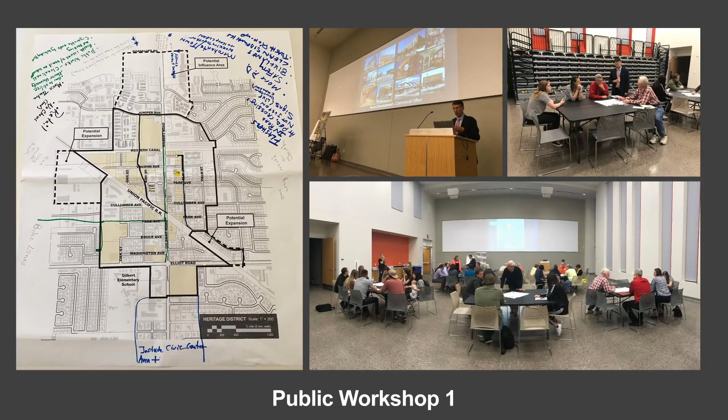The planning area was discussed, and there was consideration for potential expansion areas. Through that discussion, the planning effort will look at a 5 to 10 year redevelopment strategy for the Heritage District itself, and also provide some input for long-range planning of the area west of the Heritage District you see outlined, where the lumberyard occurs today. No consideration will occur for any other areas, north of the district or east.

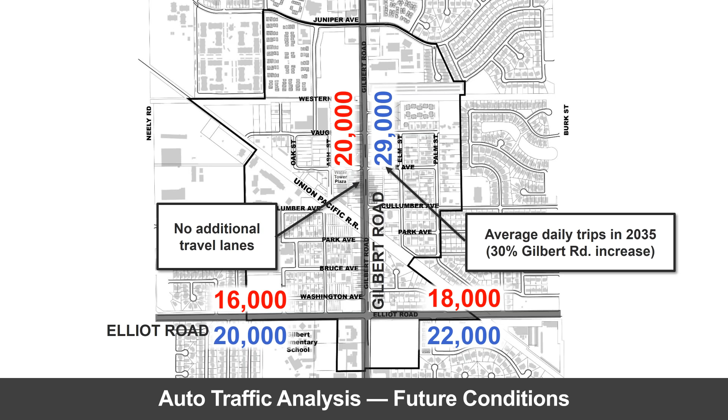Transportation was also analyzed. The first was to look at auto traffic and average daily trips, the amount of cars and trucks moving up and down Gilbert or Elliot Road, indicated here, and also looking at the future. The town has a model anticipated in 2035. That model anticipates a 30% increase of traffic without any additional capacity, so more congestion on Gilbert in particular.

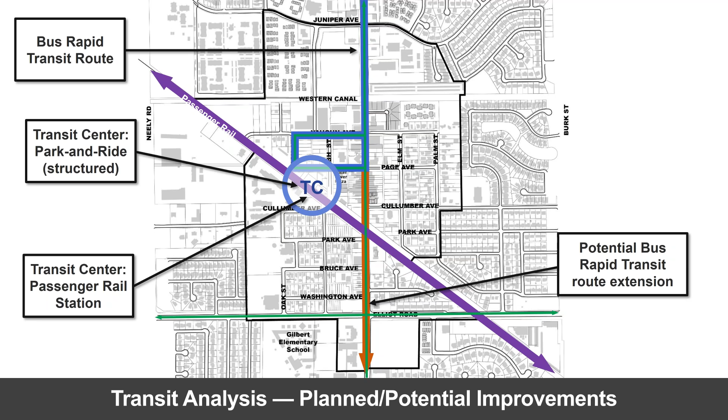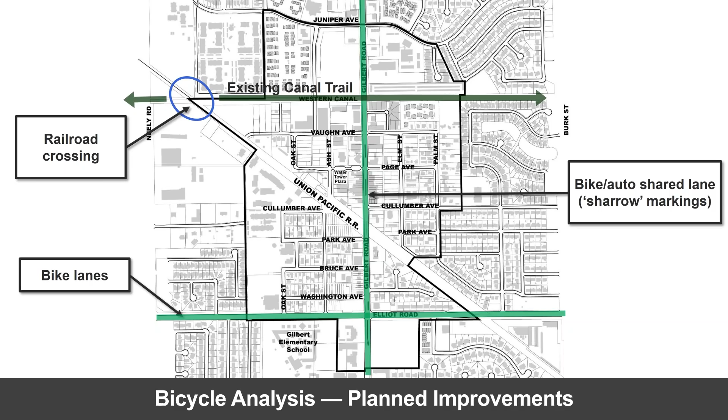To relieve that, there are some options. Transit, whether it's a passenger rail system with a stop in the Heritage District or bus rapid transit, will give some relief, along with moving people out of automobiles into bikes and walking. So the town currently has a bike master plan showing these existing facilities on the canal and anticipated changes with bike lanes and shared lanes on the areas where you see the green line.

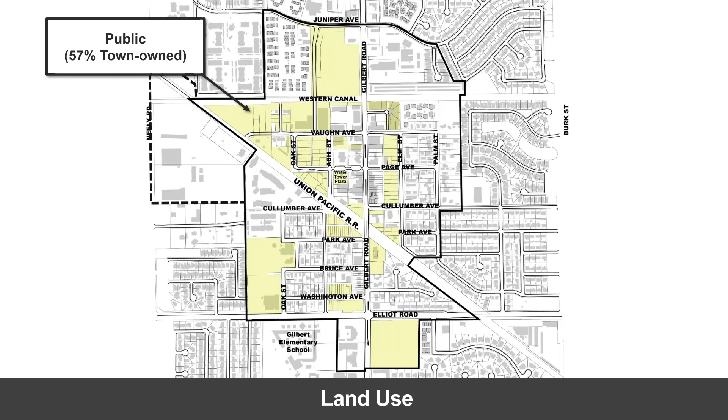Land use was also analyzed, and a recognition that the town owns 57% of the area you see indicated in yellow. That's really the focus of the planning study. And then we looked at the areas within the district as a whole and did an analysis of areas where we anticipated high potential of change within the next 5 to 10 years. And the areas where there's low potential, and in fact in many areas no potential for change, we see in the dark gray areas.

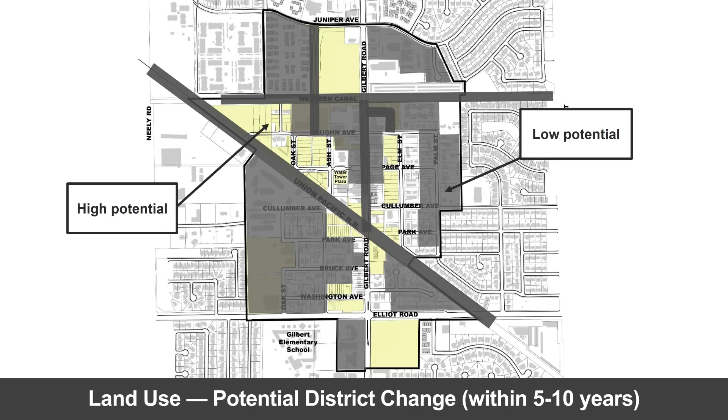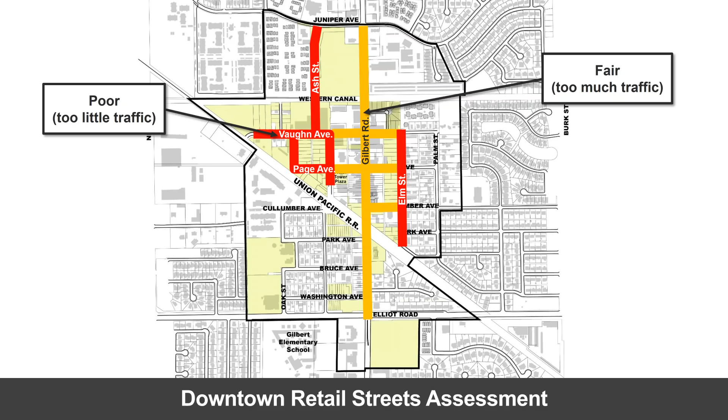With that, we looked at where we can meet that condition from 8,000 to 15,000. There, frankly, are none. As Gilbert becomes more and more busy, it becomes less pedestrian friendly and less retail friendly. And current roadways, because of their dead-end nature or lack of connectivity, have too little traffic. So you see Vaughn, Page, Ash, and Elm.

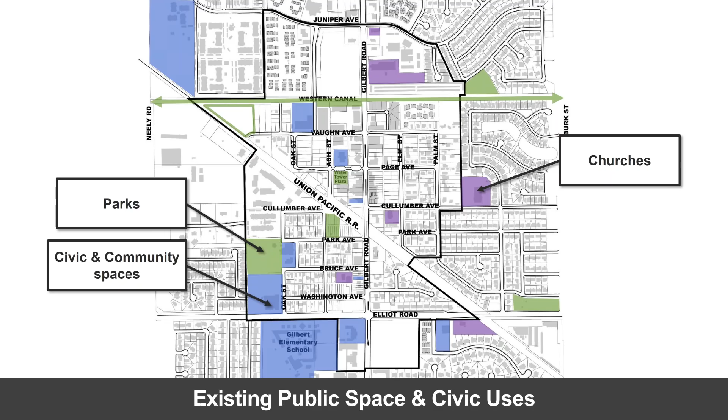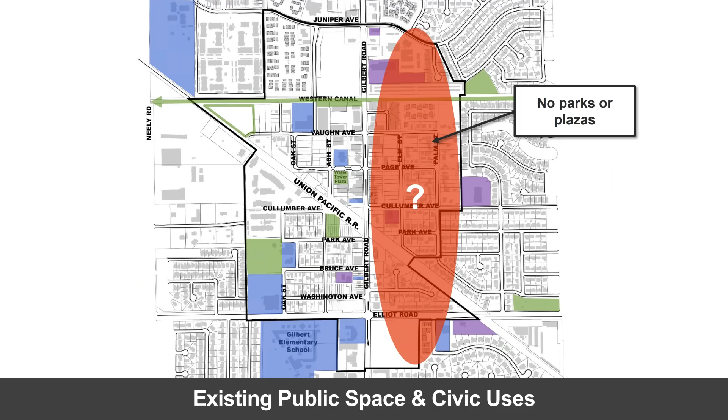Moving on to public spaces, the areas where you do have a considerable amount of parks, civic, and community space are illustrated in this diagram. There's a lot of those, generally west of Gilbert, but there are no parks and plazas east of Gilbert Road, and what could be done to address that issue.

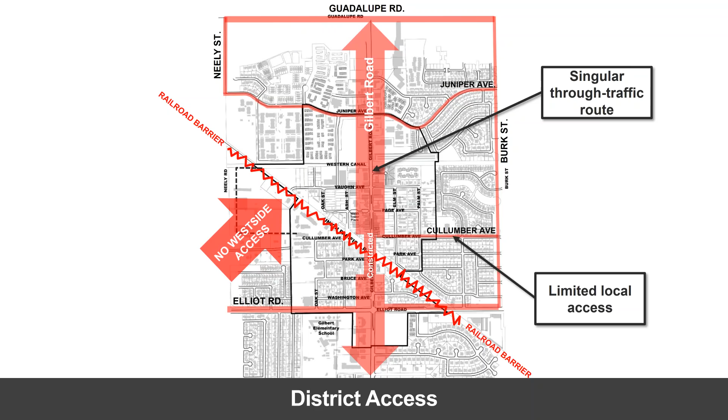Parking and transportation opportunities and constraints were also assessed, and this is a key component of this entire planning study. Gilbert is a singular route through the district. There is some limited access through existing residential areas or along Juniper Avenue today, but there is no west side access, largely due to the railroad barrier, and what can be done to resolve that issue to give more balanced access to the entire district.

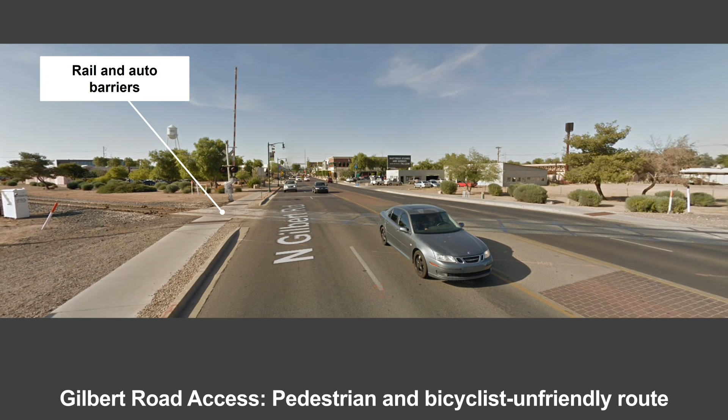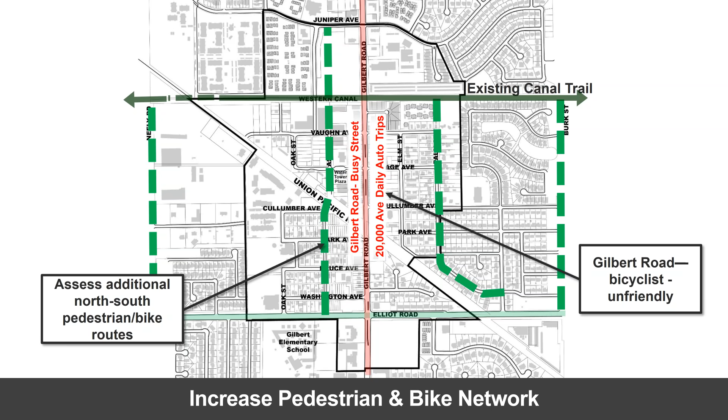Transferring people out of cars is identified by the community, so we also assess that in terms of opportunities and constraints. A lot of comments about the difficulty of walking along Gilbert. It's not pedestrian friendly, it's not bike friendly, largely due to the high traffic volumes and also the barrier created by the railroad track. And the idea here is to look at opportunities for parallel routes to that roadway. Not forget Gilbert, but look for other ways, Neely, along Palm, maybe Ash or Burk, to connect from the canal down to Elliot Road.

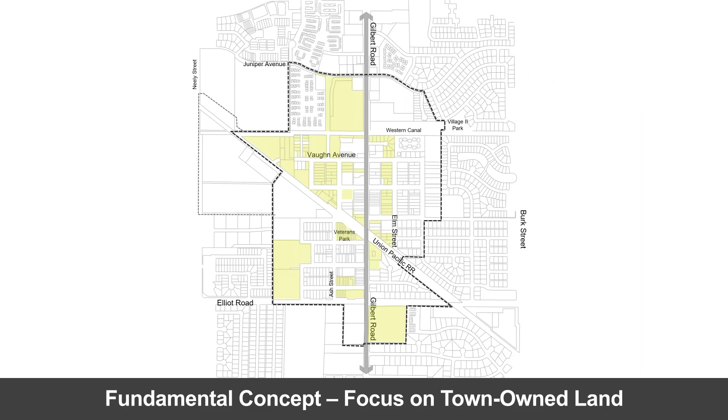With that background information and assessment, the master planning team developed a series of concepts. And so the focus of these concepts is really intended to look at things that can occur within the next 5 to 10 years, and really focus also on addressing those town-owned parcels. So a map was developed and it separates essential public amenities and key redevelopment areas.

Successful districts or downtowns follow a recipe that suggests that to leverage the highest and best use of redevelopment parcels, you need to build the public amenities, increase value, and also improve livability. So let's look at these individually by category, starting with the essential public amenities. You see 5 of those, and let's go through the character and the key points of each of those. So this is also in response to some of the issues that have been identified by the community, and so we're loosely calling this the living room.

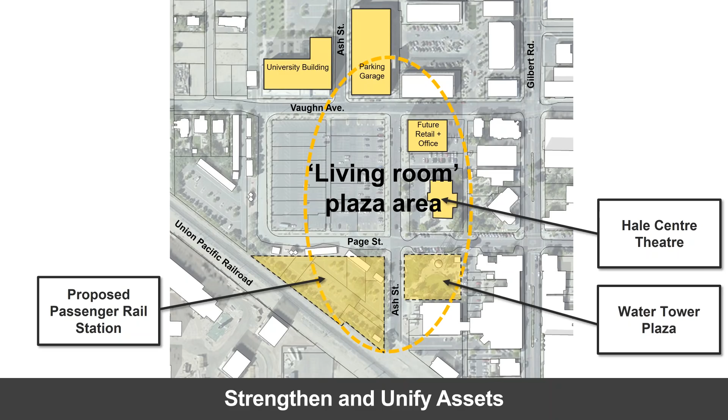The plaza, where you can have a farmer's market or other uses that have been desired for the area on a reserved permanent basis. In addition, it needs to be, to use an overused term, an iconic space where people instantly recognize it. So the place for a Christmas tree, for example, that becomes Instagram worthy. That's what this area should be. It should also not ignore some of your assets. The water tower is very important as part of the identity of the Heritage District, the Hale Centre as well, and the future passenger rail may also contribute to the character of this living room plaza. They should be strengthened and unified.

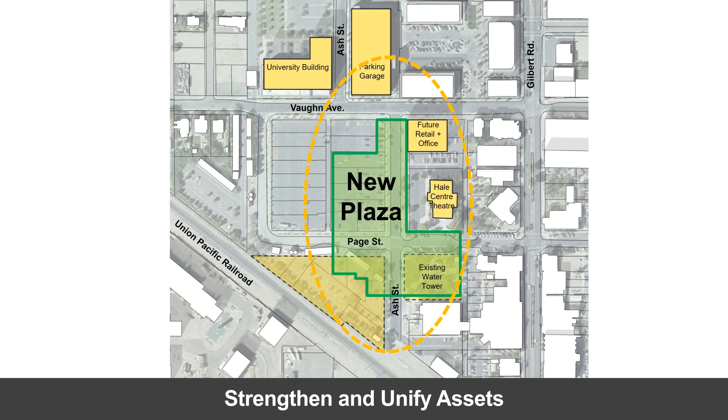The plaza area suggested occurs where you see the green coloring that would extend from Page all the way up to Vaughn and incorporate those roadways as part of the plaza space. To maximize the use of this space, Ash Street is suggested to be relocated so it aligns with the current alignment that goes between the university building and the parking garage.

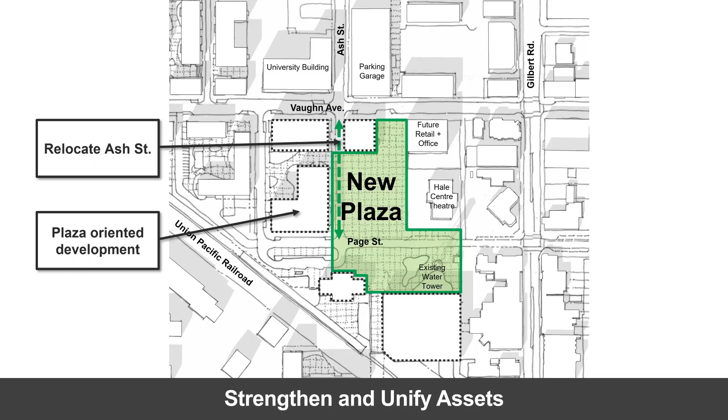The Commons is a second space, and the common space is different from the living room in that it is really intended to be the focus for nightlife activity, a dining and entertainment amenity. So as the market responds to a growing desire for additional dining and entertainment uses, those are suggested to move north of the canal and focus around this space. So the space also has another value in that it provides a window from Gilbert Road.

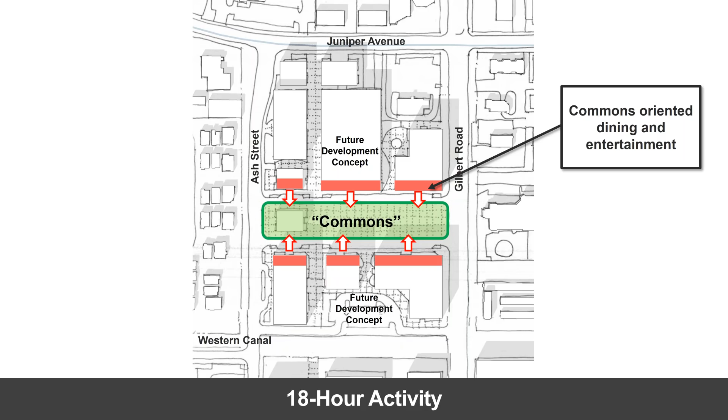So the Commons in itself is located about halfway between the Western Canal at the south of this graphic to Juniper on the north, and connects Gilbert Road to Ash Street. It's about 180 feet in width. Improves visibility, so no parcels out back and behind. It includes a couplet roadway, so a low-speed roadway for travel and also curbside parking. It would have buildings oriented to that space, so there wouldn't be parking lots between that roadway or the Commons, and the buildings really engage and provide a comfortable sense of enclosure along the edges.

Next is a neighborhood park. The neighborhood park would do this. It would be family friendly and it would be a residential amenity. It fills the void of a lack of open space east of Gilbert, and it would have more of a quiet, intimate, multi-use, residential focused collection of uses such as play structures or green areas or other elements that you would find in a typical neighborhood park. It would be located at the intersection of Elm and Page.

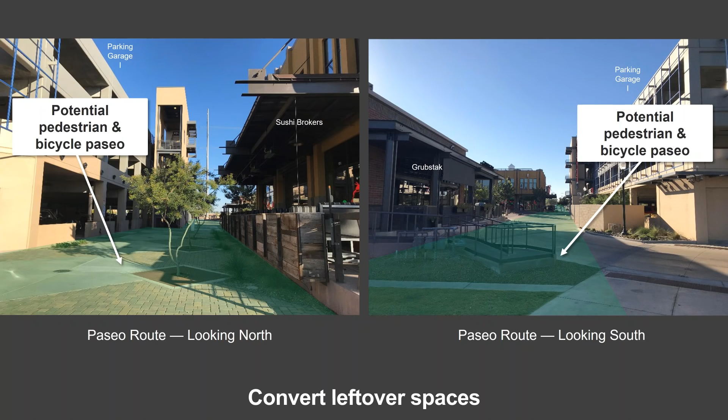The Paseo route would not be one size fits all through its entire corridor, and you see this diagram going from Elliot all the way up to Juniper again today. It would have 3 segments. Within the northern area that extends from Juniper down to the anticipated new living room plaza, it would be mostly or almost all car-free. And through that area, we would anticipate there might be segments where you may need access to service or loading. And when those uses are adjacent to the area, the car would be, as we describe it, as a guest. It would be low speed, 5 to 10 miles per hour at most, so that there would be a bias towards the pedestrian and the cyclist.

There's a segment that needs to cross the track. So that's a barrier that we want to bridge, or actually in this instance, go under. So we're anticipating an underpass. So we know, having worked with Union Pacific before, that it's very difficult to get an at-grade crossing, and it may take many years, and they probably still don't really want you to do it. So a better proposal may be to go under. And so what would that look like?

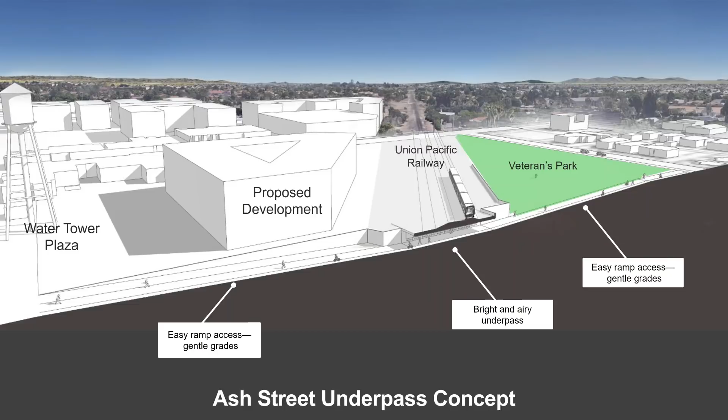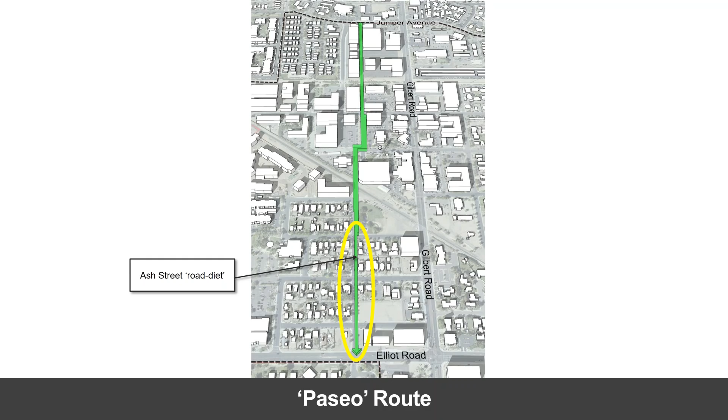South of that area, we'd like to see an enhanced bike facility complement the existing sidewalks. So within this area, we're suggesting what is called a road diet. And when we mean a road diet, that doesn't mean removing auto movement capacity, but auto parking only. So access to all streets, to all residential uses, to all the alleys would be maintained along this segment. And to get access to the school and other uses that are south of Elliot, we would suggest building what's called a protected bikeway, and it would look something like this.

And from experience from areas that get high bike ridership through districts, you need to do this. This separates pedestrians, cyclists, and auto traffic into their own exclusive lanes. And when these are built, you get the highest bike ridership. So what would that look like? So here's an example looking north on Ash from Elliot north. And the intent here, again, with this road diet is not to remove auto traffic lanes. So if you've got 2 lanes today, those would be maintained.

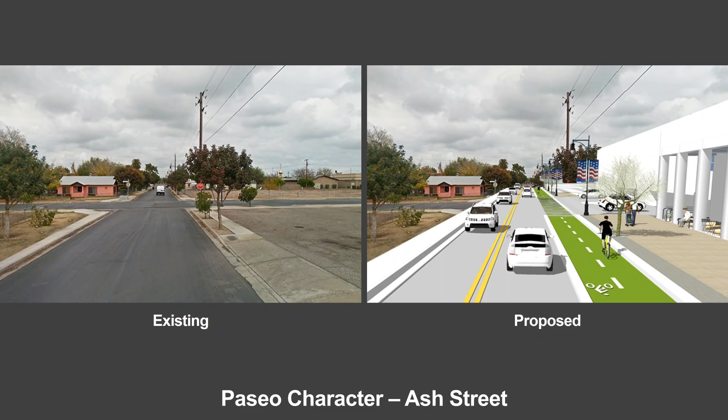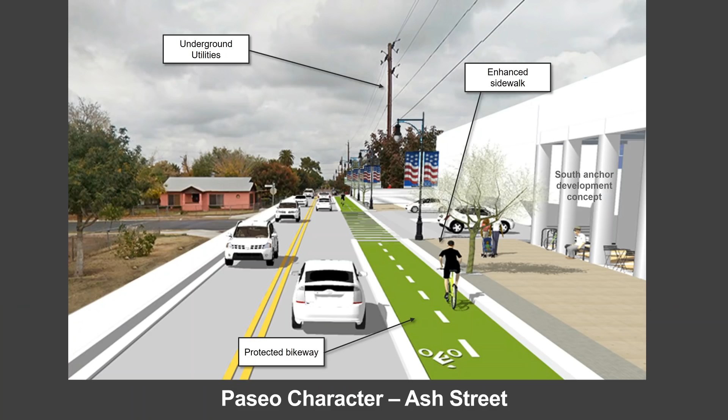The parking lane that is currently on Ash would be converted to a 2-way bike lane that you see on the right side that would be separated by a curb, and it would be raised. So the current curb-to-curb dimension is 30 feet. The improvements would be built within that, and 2 10-foot travel lanes would be maintained. There would be some other enhancements as well to the existing sidewalks. We would anticipate undergrounding of utilities as well within this corridor. But the key component of this is really the bikeway that ties into the planned network on Elliot as part of the bike master plan.

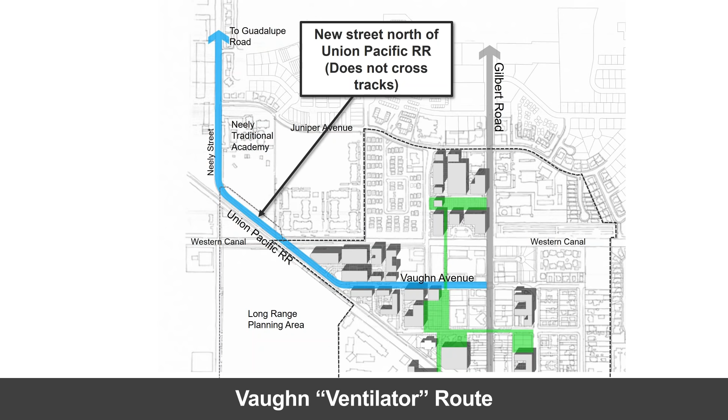And that blue line would be Vaughn Avenue that does not cross the track, but runs parallel to it and connects up to Neely all the way up to Guadalupe Road. It would be skirting the edge of the Union Pacific Railroad and also occupy a small area of leftover land at the south end of the Neely Traditional Academy. And so you see that alignment.

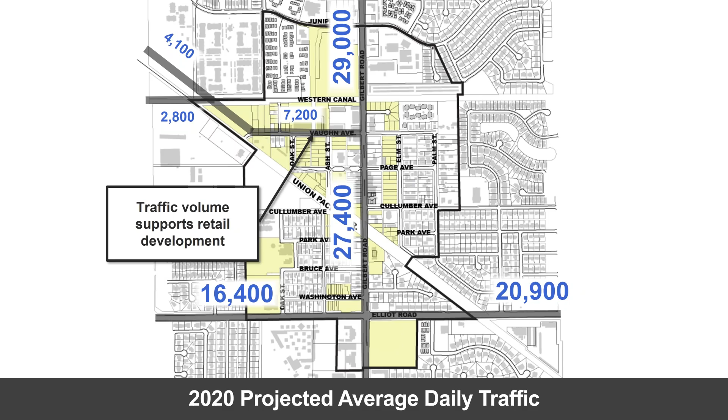We've done some traffic analysis of this, and the good news for this is it does provide traffic relief, about 7,200 average daily trips a day. And the second part of that good news is that when we look at the fundamentals for drive-by traffic for retail, this is getting close to that sweet spot of 8 to 15,000 trips a day. So it's close, and as a result of this, we think we can get street-oriented retail on this corridor. And that retail would look something like this.

So the retail here is intended to fill a void that is absent in the district today. And that is the kind of uses that we often hear people ask for, the kind of uses that people want to stroll and walk along. Experiential retail, it's often called. The kind of things that you would want to window shop while you're waiting for a restaurant seat along Gilbert today, so a table in those areas. We've heard people mention that many times. And it would be designed in terms of a celebratory kind of character, a festival street, if you will.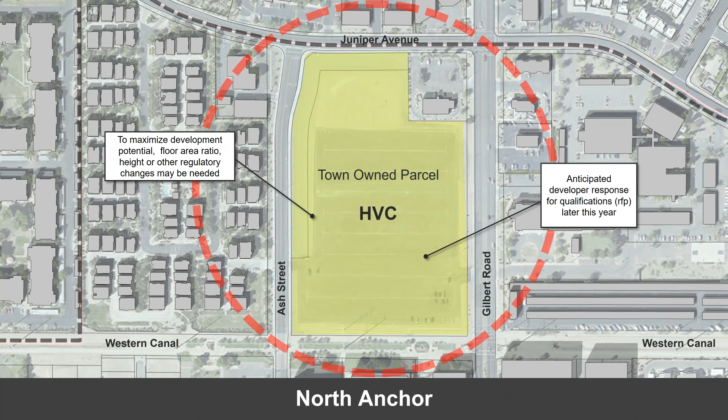So those are the key public improvements. So with that, then those would leverage some key redevelopment parcels. And we've broken these down into 3 key areas, and we expect this development to occur within the next 5 years. And so let's start with the North Anchor. The city is anticipating a response for qualifications from the development community sometime in the year. So this is a time-sensitive project area. And so currently it's zoned HVC, which is Heritage Village Commercial, and there may be some adjustments needed to that. So the area is generally from Ash to Gilbert, from Juniper down to the canal.

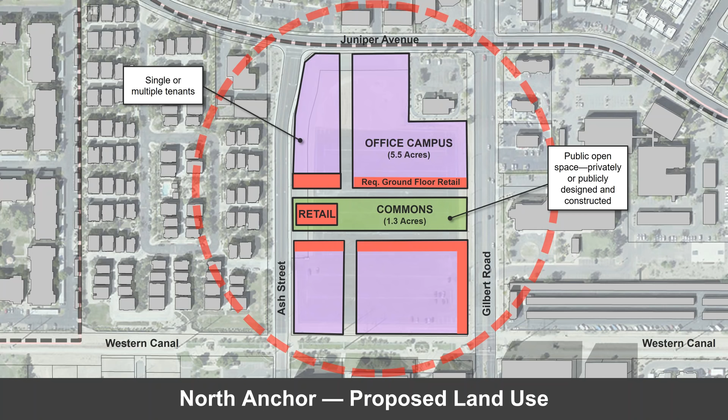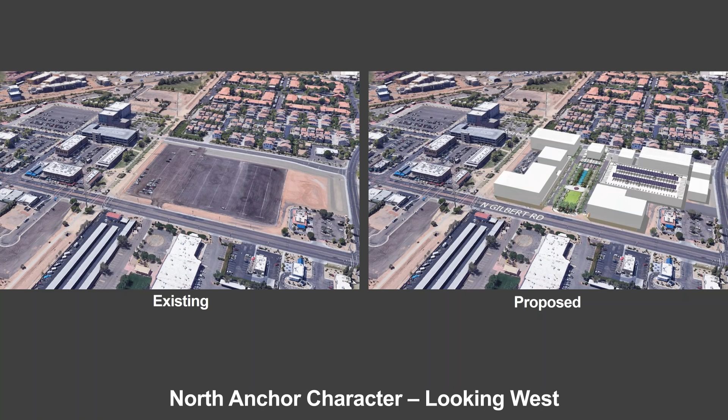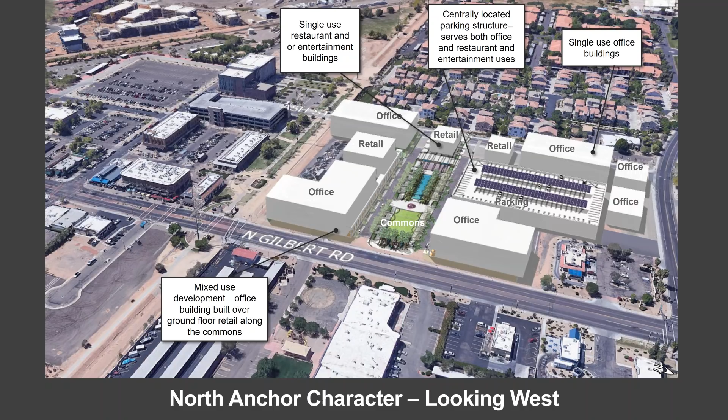Here's the concept for development, responding to the market. The hot market is office, and this office would be a campus, if you will. So it could be single or multiple tenants with ground floor retail, commons focus for that. And that's the general characteristics, what we'd expect. So looking at it in terms of 3D, on the left is existing, this is looking from the east towards the parcel, and here's the blow up of that. So generally if you do an office campus, you need a parking structure, and then the office and retail uses surround that, and it also has that focus for the commons that creates additional value adjacent to that area. Here's another view of that space. Again, this responds to current zoning regulations, doesn't require an upzone at all.

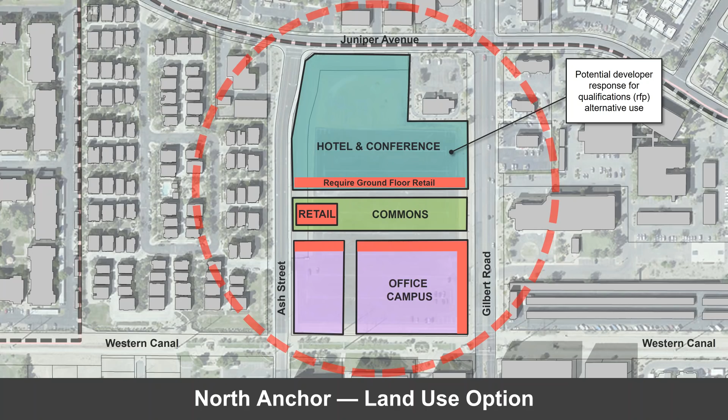Good plan always has flexibility, so as part of a developer offering, we'd also suggest hotel and conference for this site. So we know that there's a market up to 320 rooms, so you could easily fit that here, and also have area for expansion. We often find cities don't anticipate success and don't have expansion area. This site is ideal for expansion. Finally, there has been some interest in multifamily, and while you could build multifamily, they're not necessarily compatible with ground floor entertainment uses because of the noise and activity that extends beyond the hours people would prefer if you lived on a retail development adjacent to those types of uses.

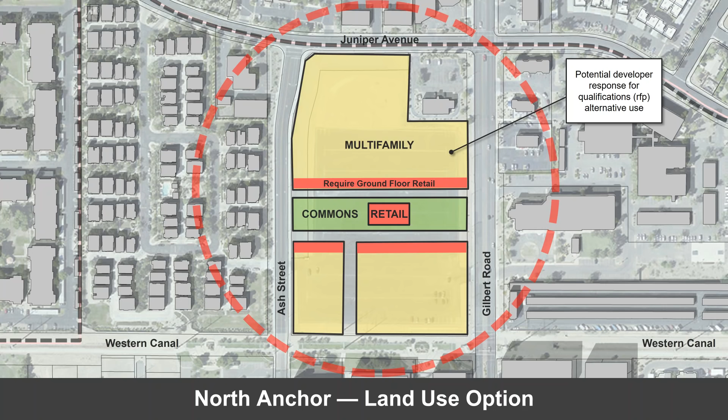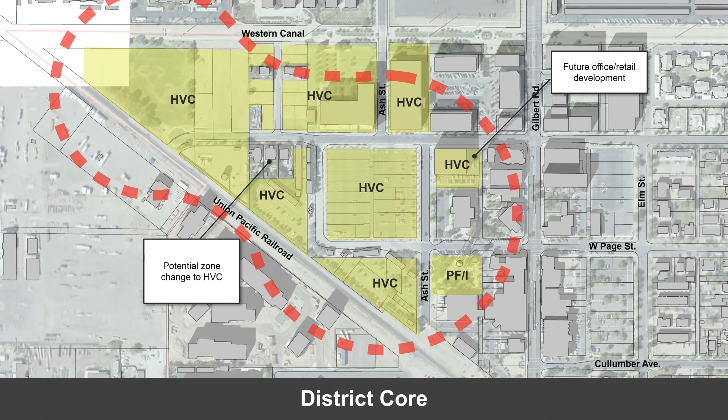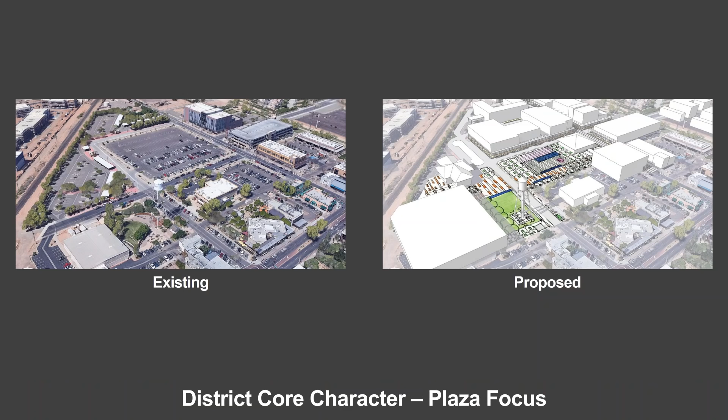Moving on to the district core, the bean-shaped area. So this is in the heart of the district and includes 2 sub-areas. So again, looking at what the town owns in yellow and what the current zoning is, largely HVC, a parcel or 2 may need to be rezoned. And the fine grain character here. So multiple types of uses, whether it's office, multifamily, transit center, and the plaza illustrated. Existing and proposed, looking at the massing. So this is looking from the southeast towards the northwest. You see the university in the background on the left side, and the focus here around a plaza.

So this is intimate. It creates enclosure. It's respectful of the tower plaza. There might be a parcel or two where height increases might be considered, as long as they don't overshadow or block views of the tower. There's also a park and ride that may also be a public parking structure, because we're going to lose a little bit of parking with the development of this plaza in your existing parking lots.

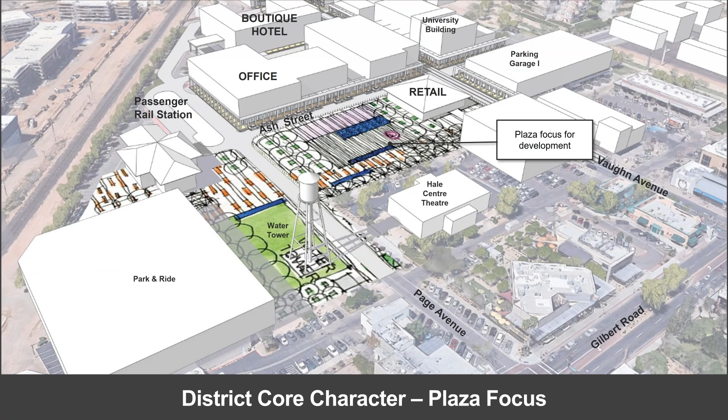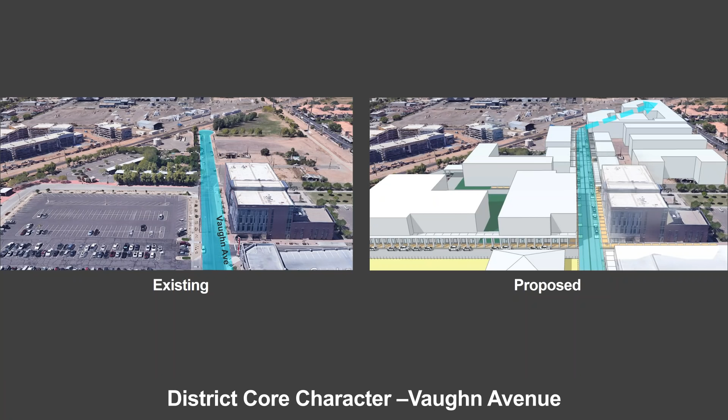Looking at Vaughn itself, it's a different type of street. So it's enclosed. It's a little bit more intimate. It would have arcades along the edge. I'll talk about that in a minute. And it's about the same scale as the university building. So it's edge to edge and with connections of arcades that even create a little bit more intimacy.

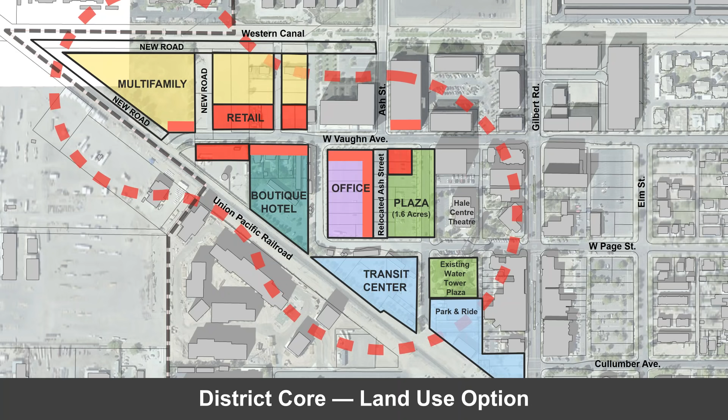So that's the overall concept. There may be an option as well, but we had office before. It could also be multifamily. So a bit of flexibility as well within this district.

Finally, moving down to the south anchor, this is a unique area as well. So the town controls the areas where we anticipate development, and there's two zoning categories here, HVC and single family 6, which is, I believe, 6,000 square feet lots. And it's likely that that area would be rezoned to HVC to have some consistency, along with vacating a portion of Washington Avenue from Ash to the alley to make one contiguous parcel.

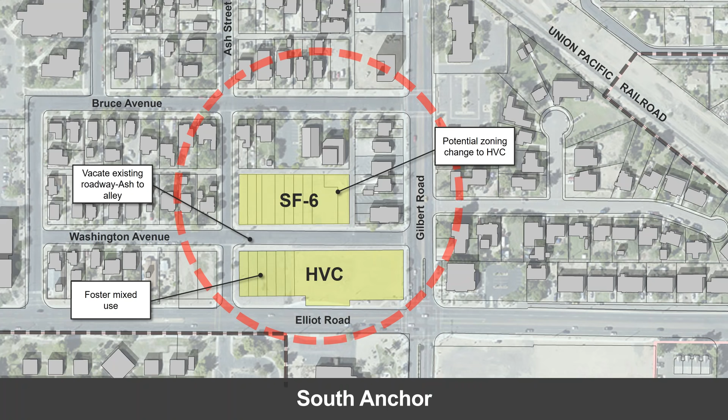The concept for that area looks something like this, with retail focused at the intersection of Gilbert and Elliot, maybe an anchor use, and then mixed uses of professional office above retail to the west of that, with a large parking reserve behind it to serve it.

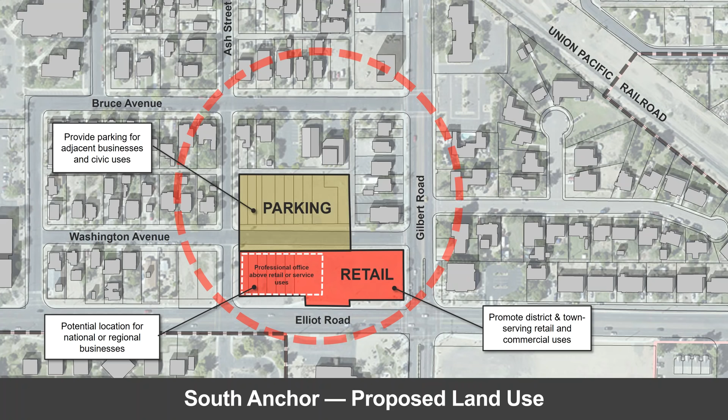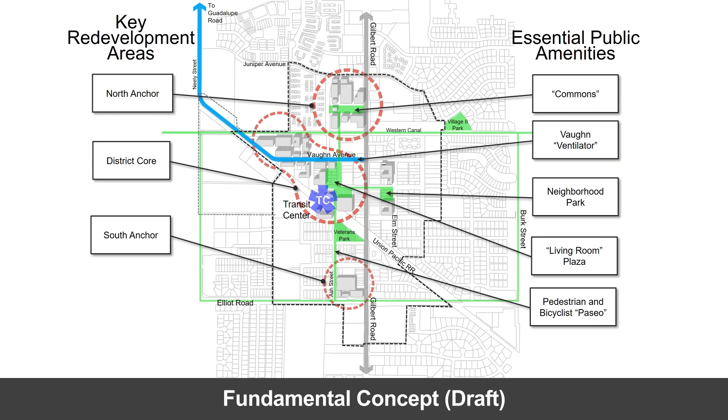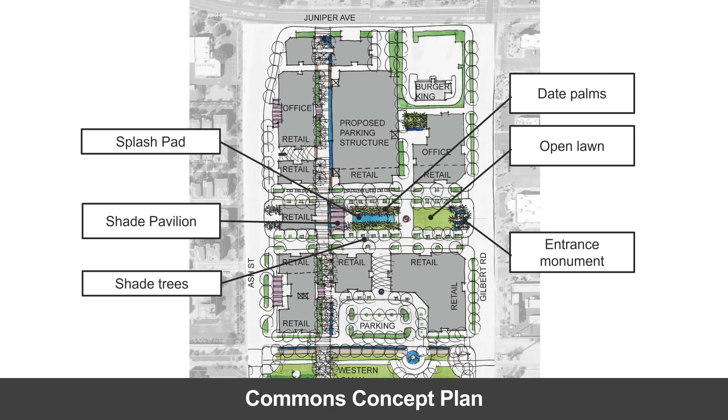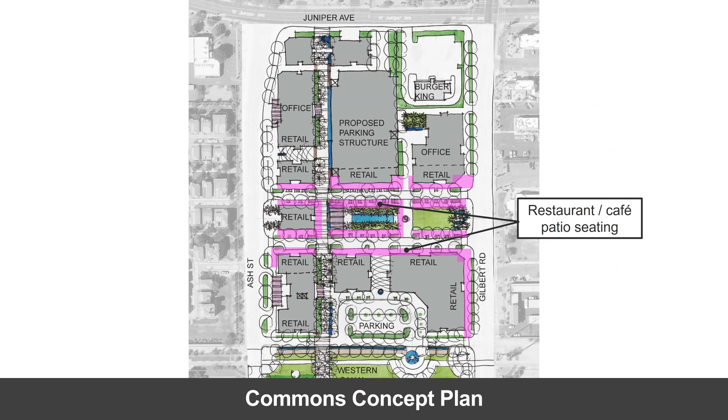Those are the key amenities, the key essential amenities, and the redevelopment areas. There are some details as well, and those have been developed for the Commons and the Living Room Plaza. So for the Commons, we'd anticipate some other elements that would really populate this and make it a very interesting area. And those are listed here, and I'll show you some examples of those with some close-ups. We would like to get some seating here. So this is our activity area. So some of the seating would be adjacent to the uses, but also within the Commons area. Some sections to give you a little bit of the character of that.

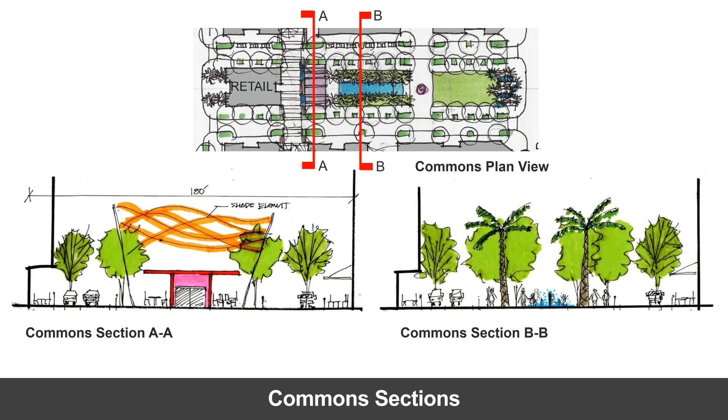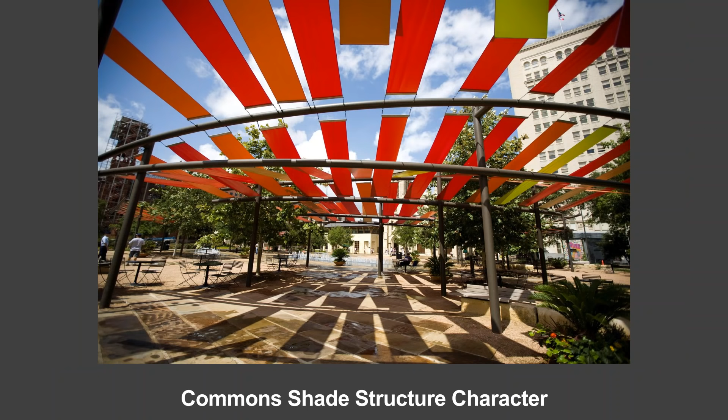So shade is an issue. It gets hot in Arizona in the summer, so we need some shade. It might be through trees or covered structure. And water would also be welcome. So this is a place for splashing in water and relief from the desert heat as well. So this is an example from Scottsdale, and these could be turned off and be activity areas when the water is not running. And shade structures can take very many types of characters, but they could be permanent or temporary.

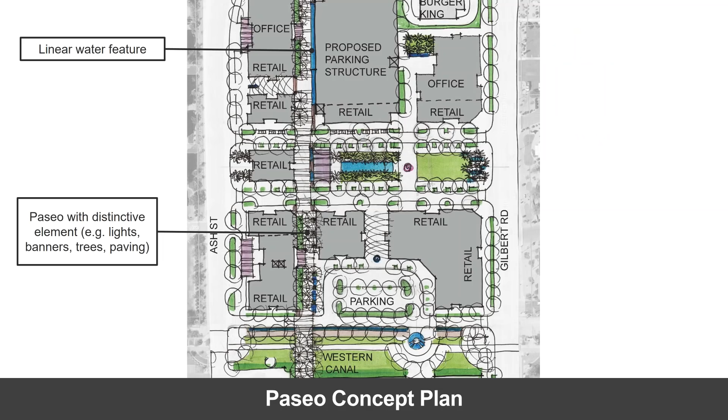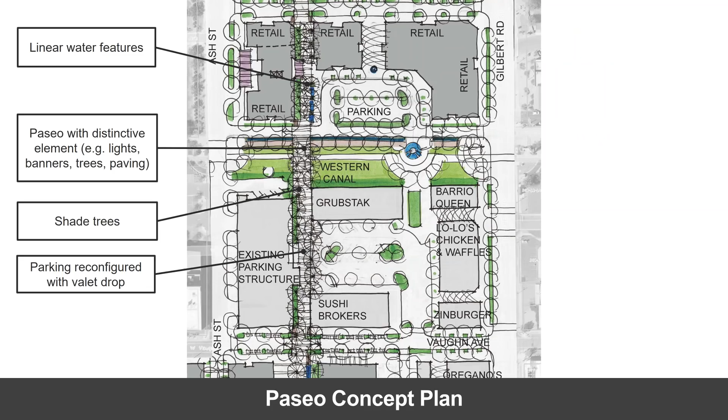The Paseo in itself, that connection north-south, that car-free connection, could have a lot of elements, and maybe there's some historic recall to the area. So maybe have some linear water features, there would be landscaping, shade trees, and they may require some changes to the existing parking lots between the Grubstak and Sushi Brokers, for example. How do you get in the parking garage? So it has more of a pedestrian bias.

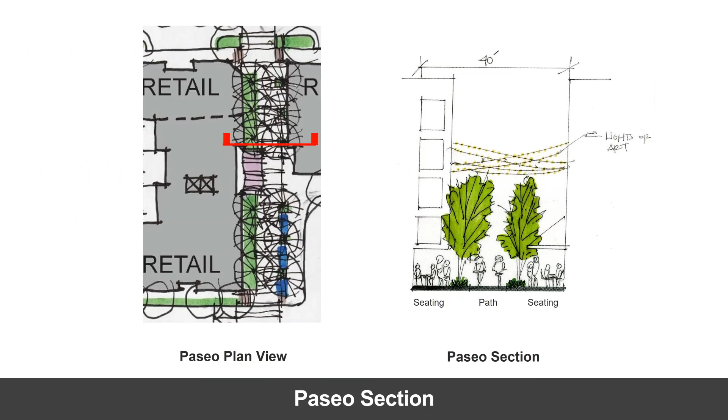And the dimensions of this is generally about 40 feet in width, enough area to accommodate seating and a separate walkway. And it may look something like this with trees, special pavement, outdoor seating, and doors and activity along it. So it's not a backwater. It's the kind of place you want to assemble along. To create shade, there may be other elements, and those might be interchangeable during the season.

So this also provides, again, this common thread of elements that tie the north to south. So it's distinctive, almost a breadcrumb sort of thing, where you can follow along simply because there's some visual clues along the entire route. We'd also like to make sure that there's some recall to the history and the character, so it's not placeless, but this reflects the culture and the history of Gilbert. So there may be something that's related to the canal system.

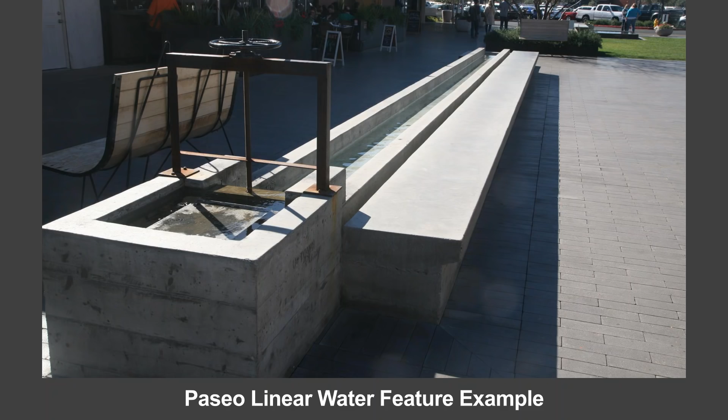One of the key ideas here is really to take the car out of play to a large part and design Page and Ash as curbless. So the cars would move through here, and during large events those roadway areas could be utilized for assembly areas or setting up booths for farmers markets or other activities. So this would be the only areas where we anticipate roadways being closed in the district, along Ash and along Page within this district during special events. And that wouldn't occur very often, but we designed the streets to accommodate that.

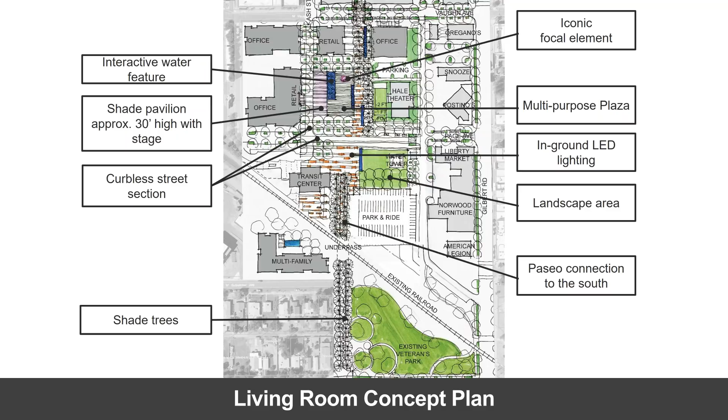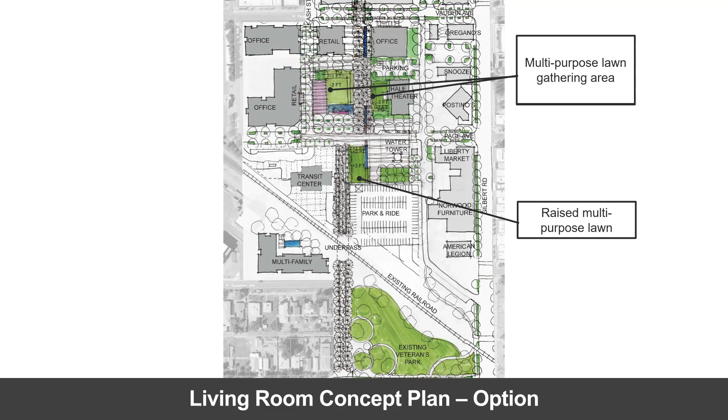There's options. There may be areas where we may want to increase some of the green area. So it might look something like this. We'd probably discourage change in grade. That reduces the flexibility of space, but the general character might have some of these elements.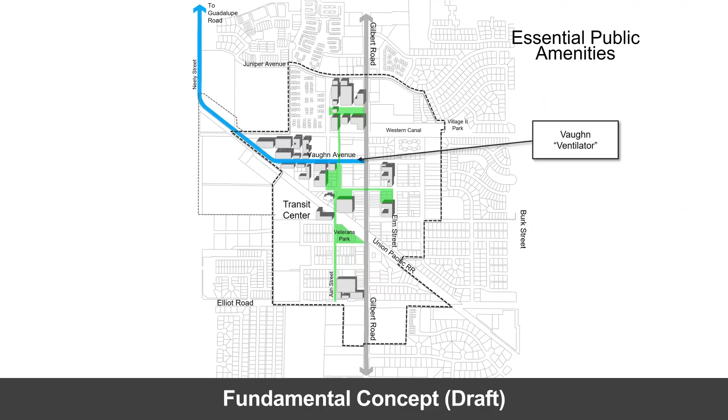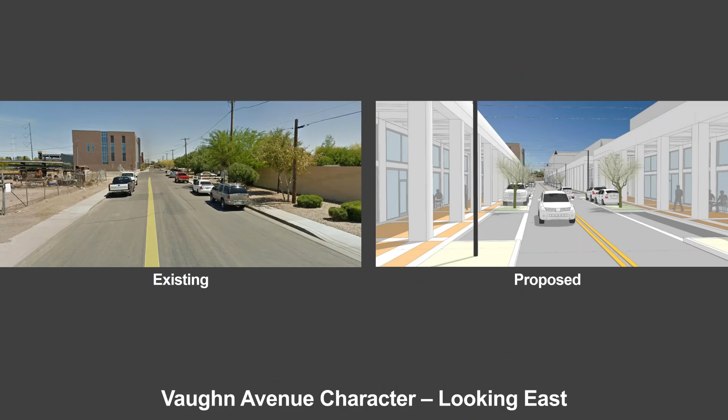So we anticipate the minimum height of this arcade to be at least 20 feet, and the width to be at least 15 feet wide as well. So what would that look like? So this is looking at Vaughn towards the east. You see the university building in the background and the proposed improvements on the right, and a blow-up of that. So you've got 2 lanes of travel. You've got curbside parking, interrupted by trees and planting beds, and then on the edges of the roadway are 2 sidewalks that are brick and covered walkways in the arcades.

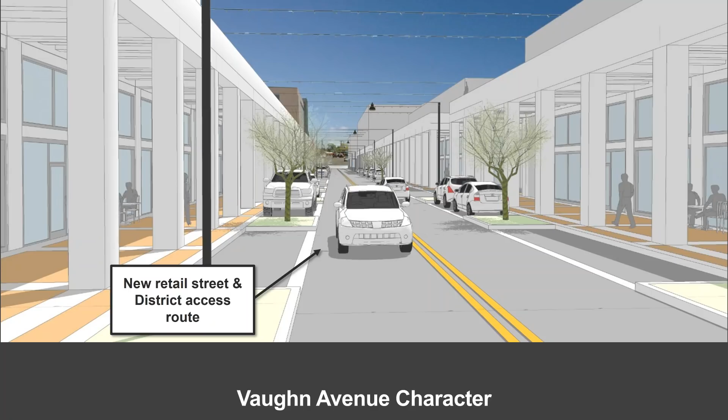And a plan view would look something like this. The brick sidewalks, you see the dots, those are where the columns of the arcades are. And then where the buildings aren't continuous, you could even extend that arcade to tie them together. So you create these wonderful little courts and plazas and special spaces, and you're always under shade. So think of a 110-degree day, you don't have to go out in the sun. So there's an added benefit for this.

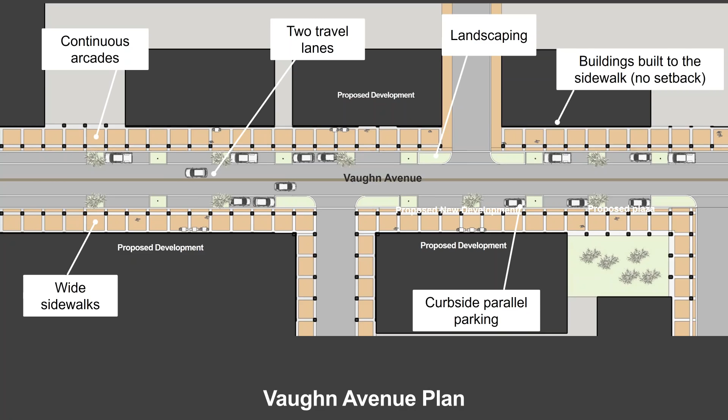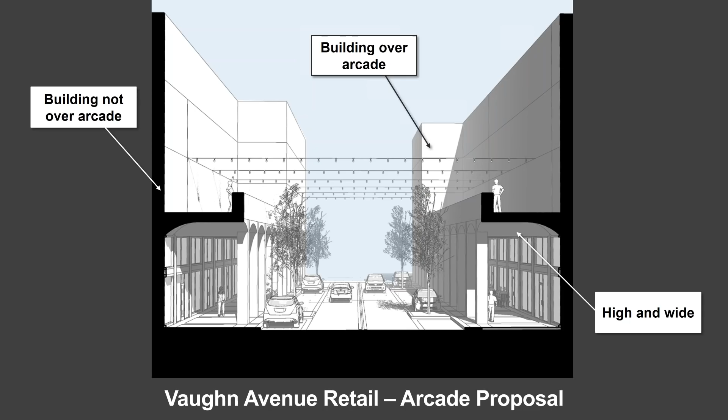And there's some flexibility for the development community as well. So you could either build the arcade freestanding with no building over it, or to extend the building, get a little bit more use over the arcade on upper floors, you can build over it. And that's what this is intended to illustrate, the general characteristics of that. And the sense of intimacy and the festival character of the lighting and other elements, the landscape that would occur along this roadway. A special and different street that is unique to Gilbert.

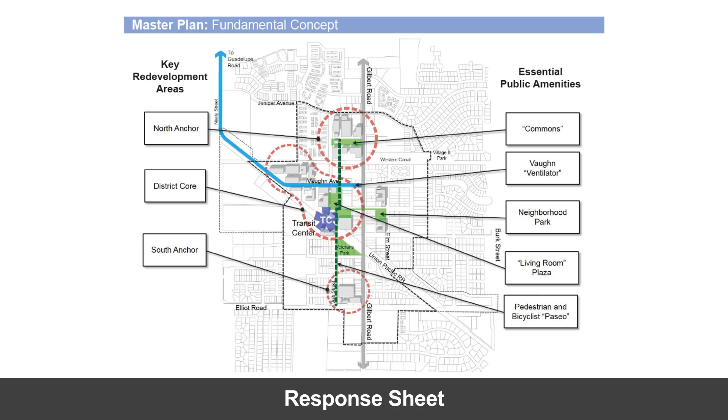With that, it's time to fill out a response sheet, and the response sheet looks something like this. So it includes that fundamental concept and a couple of questions that we are requesting concerning the proposal. So here it is again. There's an opportunity to mark up the graphic, change it if you like. But the key component of the response sheet is really filling out this ballot, if you will. And we've got a column for yes, if you agree with the proposal. If you don't, you can mark no. Or if you've got another idea, that's welcome as well. And you can check other and then write down some comments that might explain your rationale.

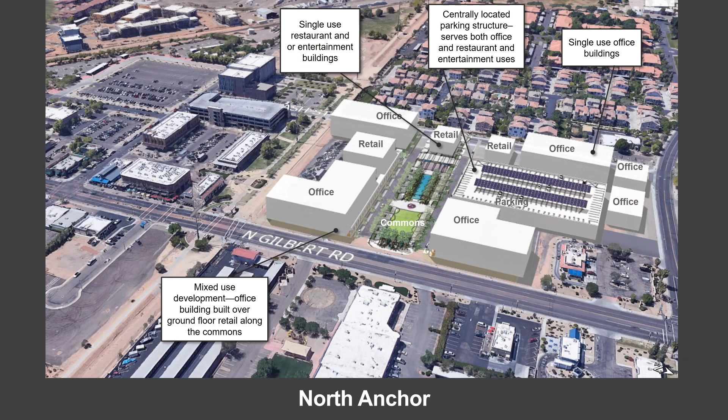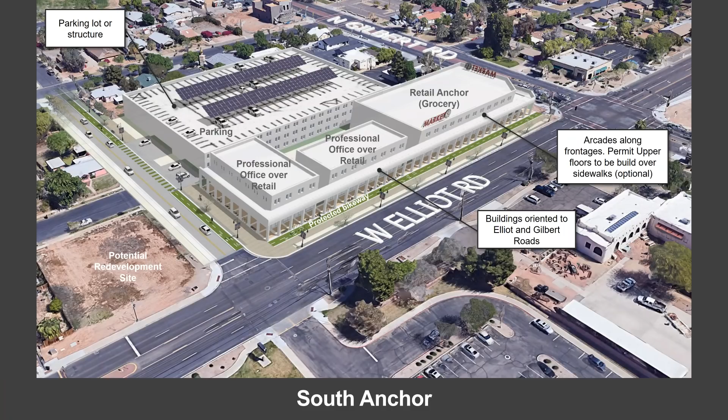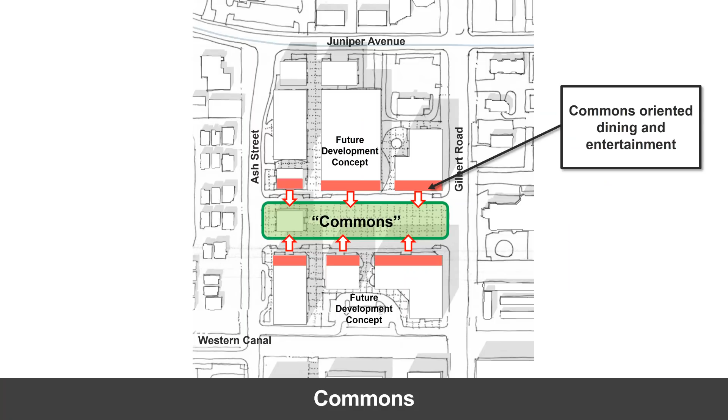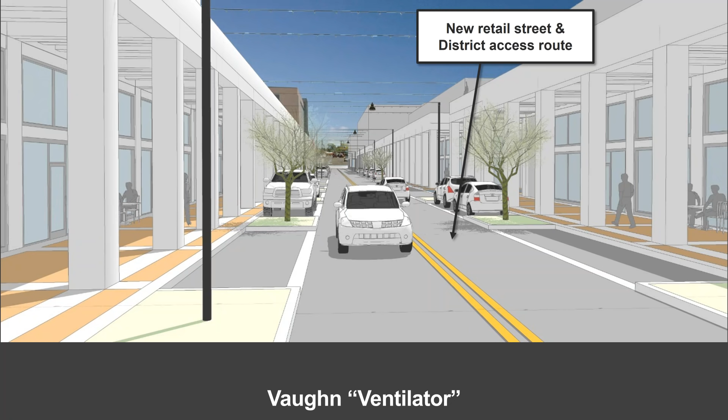So to refresh your memory again, the North Anchor is office focused around the Commons. The District Core has development around the plaza and also along Vaughn. The South Anchor has development focused at the intersection of Elliot and Gilbert with parking behind it. And then the essential public amenities include the Commons, which is halfway between Juniper and the canal, and it extends from Ash to Gilbert. A new Vaughn ventilator provides west access that relieves traffic along Gilbert and provides a focus area for new retail.

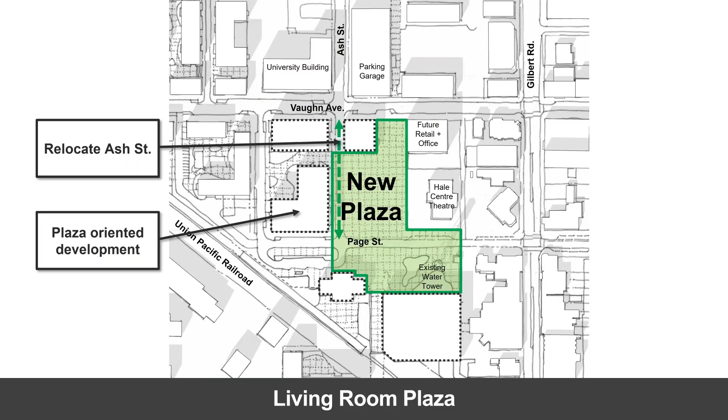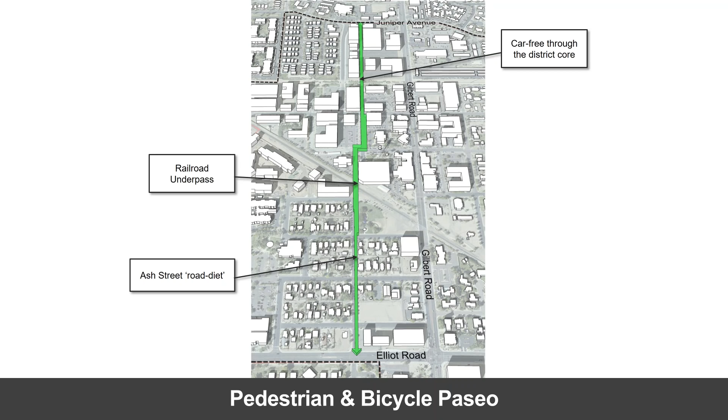A neighborhood park provides an amenity for those areas east of Gilbert Road that don't have that today. And the new plaza, that living room, that Instagram moment for Gilbert that builds off of the existing tower and Hale Centre. And the pedestrian and bike Paseo that has the bias towards the pedestrian and the cyclist that provides a common thread throughout the district.

So the next steps, after all the information is compiled from these initial master plan concepts, will be presented at the end of March, along with some initial thoughts for the overall redevelopment plan. That's the presentation, and thank you for listening.